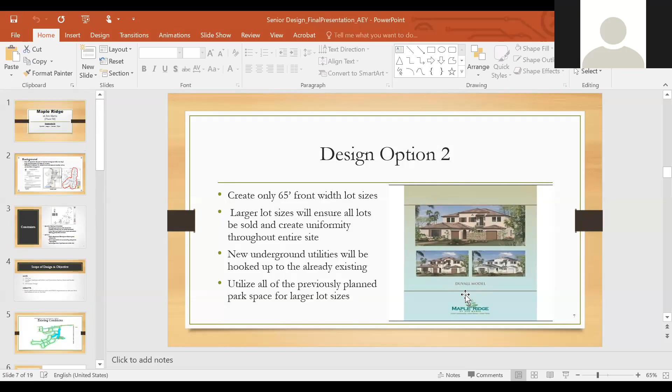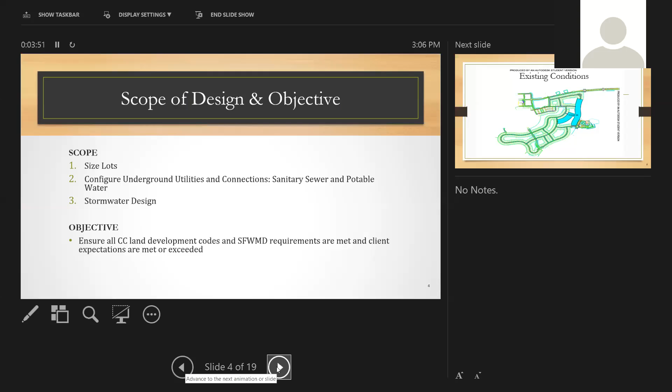Marcos, you still there? Oh, sorry, I forgot to unmute.

Apologies. Okay, so our first design option would be to use 55 and 65 foot front width lots only. In the bottom right in green, this is a green space we would be utilizing. It's previously planned as park space, but we would use it for these larger lot sizes. The red arrows show our previously constructed on-site lakes, which we would use for stormwater retention and treatment.

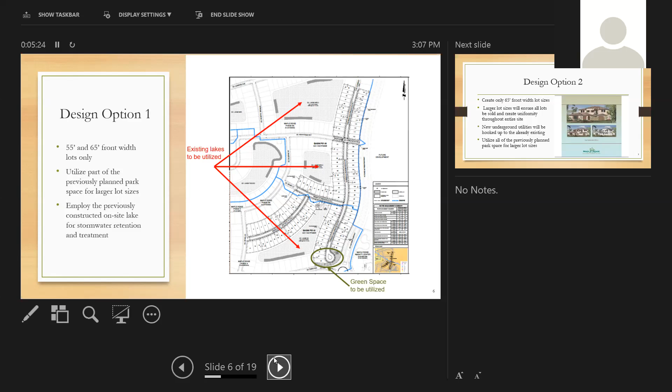Here's our second design option. This would be to create only 65 foot width lot sizes. This is considered an option because our client did state that the larger lot sizes were selling better, and it also creates uniformity. In this option, it's different from design option 1 because we would be using all the previously planned park space for the larger lot sizes. Again, underground utilities will hook up to the already existing underground utilities.

Here's our third design option, which would be to create only 55 foot front width lots. This would maximize the amount of lots in our development, which would exceed the 121 lots. We would still connect to the existing utilities, but we would also have to consider if having more than 121 lots would create any problems with existing infrastructure. Stormwater calculation would be done using the existing ponds again.

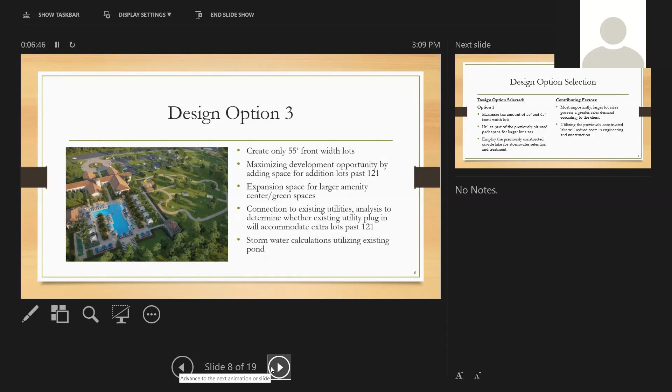So the option selection was, we ended up going with the one with multiple front widths, and we tried to maximize the amount of 55 and 65 foot front width lots. The contributing factor to that was, as we spoke about earlier, they were selling better, our client mentioned. So we figured that maximizing that would maximize sales, as well as utilizing the previously constructed lakes would obviously reduce cost in engineering and construction because they're already built and permitted.

Okay, so here we have some of the preliminary utility engineering assumptions. For this design, we focused on ensuring a water distribution network that would meet the requirements of the Land Development Code. To model the network, several design assumptions were necessary. WaterCAD was the program used to simulate the network. To model the existing connections, reservoirs were used at the connection points, provided with an existing water pressure of 89 psi. At the connections, the reservoirs were set at a foot of head of 205.59 to resemble a pressure of 89 psi at each connection point.

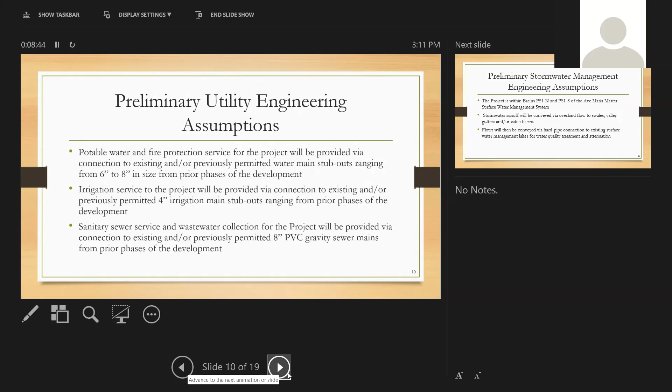Next, junctions were used to connect hydrants to the water main. The hydrants require 2,000 gallons per minute per the Land Development Code and need to be spaced at 400 feet, also per the Land Development Code. Junctions are also used to simulate demands of the 121 residential units. However, for this design, the focus is ensuring that 2,000 gallons per minute is available for each of the hydrants to meet the fire flow requirements.

All right, so some of the preliminary stormwater management engineering assumptions. As stated before, this is a master plan community, Ave Maria, a very large community. Phase 5B actually lies within the basins PS1-N and PS1-S, the north and south areas of that basin. The stormwater runoff is going to be managed by using overland flow off the lots to a series of swales, some valley gutters, and catch basins in order to discharge it into the 3 existing lakes for retention and treatment.

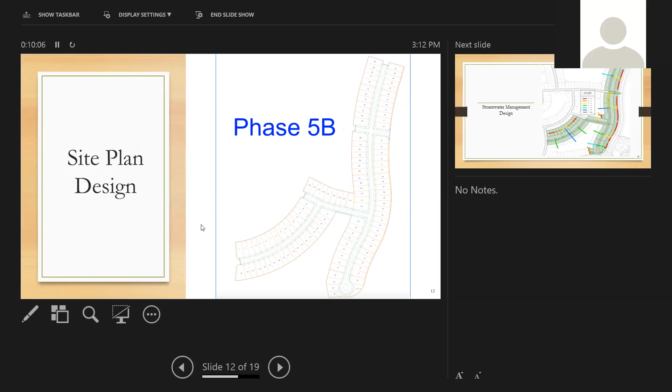So this is the site plan design. As you can see, the green space that once existed around the cul-de-sac was used to maximize the lot sizes. On the right side of the cul-de-sac, it says dog park, but it's just green space. We decided that area couldn't be used for a lot because of its awkward shape. But all of the existing lots on that road were either extended 10 or 5 feet to make them 55 or 65 feet wide in the front, to maximize the sales opportunity.

For the actual stormwater management design, we employed a Bentley program, StormCAD, which I'm sure many of you are familiar with. This was used to ensure that the existing lakes were ample to handle the discharge and treatment due to the new construction of phase 5B.

The model produced can be seen here on the right side of the screen, which is comprised of a series of catch basins and yard drains, various sizes and types of pipes including concrete and HDPE, and 9 outfalls to the existing retention lakes, 3 of those.

This model was created with some help from Nathan, as we had some licensing issues and other things. So we want to thank Nathan for helping us with this.

StormCAD utilizes the NRCS curve number method, which I'm sure many of you are familiar with, so I won't take too much time on that. I know we're running low on time here.

As you can see here, after creating the model, the program was run and the results can be seen here. This was just the outfall table. As you can see, the HGL does not exceed the tailwater elevation at any point, which shows that the existing lakes can be used to treat and store the maximum discharge.

After completing the initial model setup, for the utility design, the project required 15 hydrants per the spacing requirements. As shown in the table, the local fire flow required was set at 2,000 gallons per minute with an upper limit of 5,000 gallons per minute. By examining the existing conditions, the site contained 5 water main connections, each with a pressure of 89 psi.

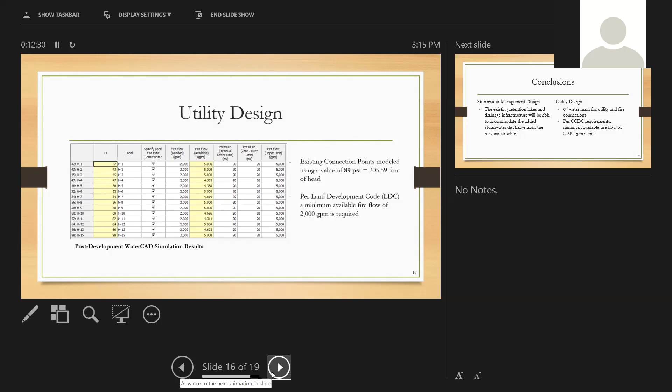Pipe sizing is also an important component of this design. For the initial simulation, a pipe size of 6-inch PVC was used over the entire network. After viewing the results, the available fire flow exceeds 4,000 gallons per minute at all 15 hydrants, so we did not increase the pipe size. Therefore, to conclude the utility design, a 6-inch PVC water main can be used over the entire network.

I already touched on this in slide 15, but in conclusion, we did conclude that the demand could be met by the 3 existing retention lakes on site for the new construction and runoff due to the new construction.

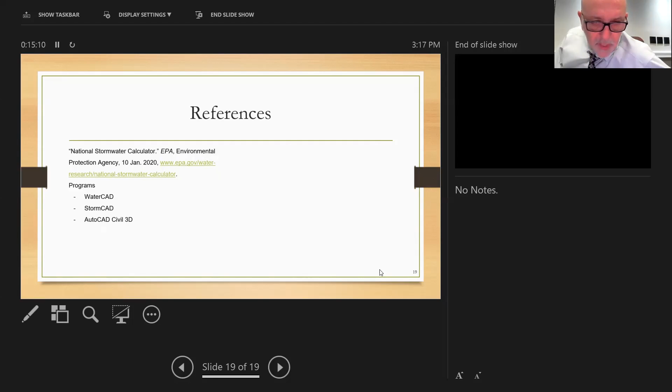They were not. They were previously constructed and in place, so we didn't specifically look at their weir elevations. We just wanted to ensure, for the scope of this project, that they would be ample to handle the flow from the new construction. We did not specifically check the outfall structures with the weirs because, A, they were already in place, and B, that would add a little bit of cost for our client. So for the scope of this project specifically, we did not check those weir elevations.

No, to answer your question. But obviously in the real world that would have been something that would have been addressed. For the scope of the project, we just neglected that. All right, thank you.

This is Julio. I got a question. In regards to existing traffic conditions, the original permit for Ave Maria had some traffic generation done by different sectors. So in determining the number of lots you can design in a specific area of Ave Maria, the limit on the amount of traffic you can generate from the new area might constrain your number of lots. Did you take a look at any of that?

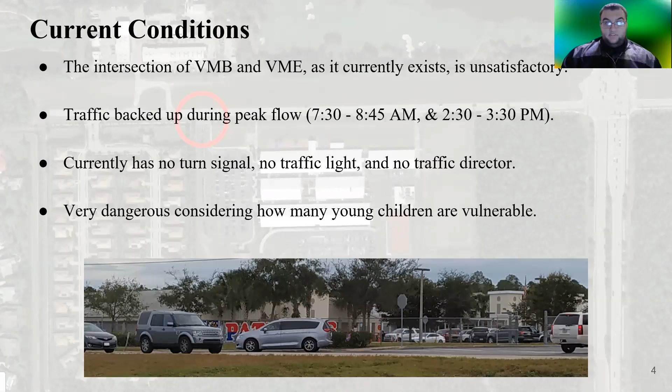To better understand what needs to be done for the roadway, we began by analyzing the present effectiveness of the intersection. To do this, we need to determine two separate things: our 15-minute traffic volume and our normal traffic volume. Afterwards, we could calculate our peak hour factor, or PHF, in the PowerPoint. Values between 0.25 and 1 are considered acceptable ranges, with 1 being the most optimal.

To find our traffic volume and 15-minute traffic volume, observation of the intersection had to be done. After meeting several minutes before a known instance of high traffic flow, we continuously noted the number of cars headed up and down the road.

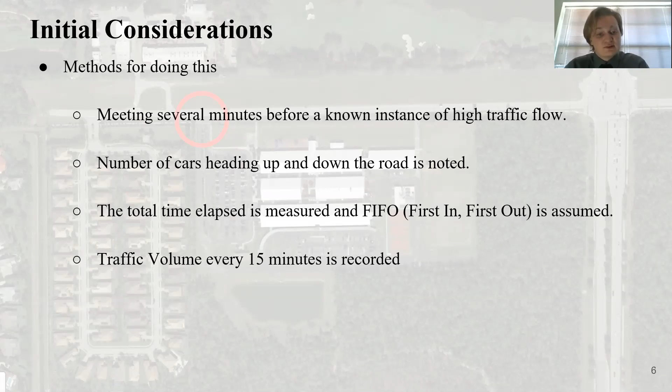During our analysis, we noted the total traffic volume at every 15-minute interval. At the end of our observations, we also recorded the total elapsed time and assumed that the intersection operated under first in, first out conditions.

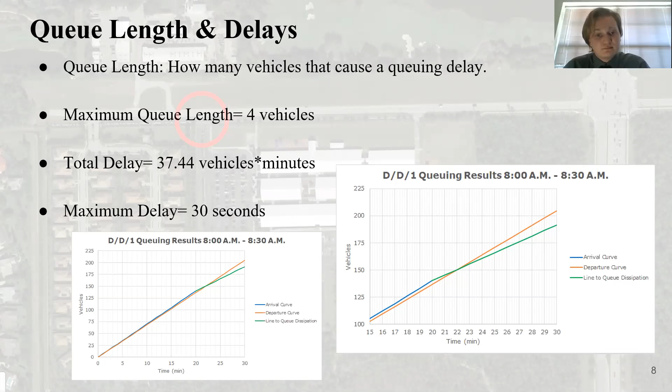We talked to our client, Christopher from Collier County, and we were informed about the new high school being built to the west of Veterans Memorial Elementary, and that Veterans Memorial Boulevard would be extended all the way to Old 41 Road. To account for the increase in traffic, we assumed a 4-lane, 2-way road for Veterans Memorial Boulevard.

So I'll briefly summarize the three alternatives we created, and I'll allow my partners to explain them in greater depth in the following slides. Our first alternative was to create one westbound turn lane where a left turn can only be made on green. Our second alternative was also a single westbound turn lane, but with a flashing yellow arrow. Lastly, our third alternative was two westbound turn lanes, with left turns only on green again.

Next, you'll see the AutoCAD drawings for these layouts. Options 1 and 2 are pretty similar in design, consisting of a singular left turn lane and a traffic stop. Both of these designs have only one difference: the left turn signal requires green to turn in option 1, while in option 2, the left turn signal is a flashing yellow for yield.

All right, here's our option 3 layout. This is the one we ended up choosing. This AutoCAD drawing shows the intersection having 2 left turn lanes going into the school instead of 1, and shows the 20-foot medians on both sides of the intersection. 4-foot wide bike lanes are included in the design, as well as a 10-foot wide pedestrian walkway that will allow plenty of students to cross at one time. All of the center, turn, and stop lines are drawn to DOT standards. Our team believes this is the most practical layout of the intersection to provide the best flow of traffic.

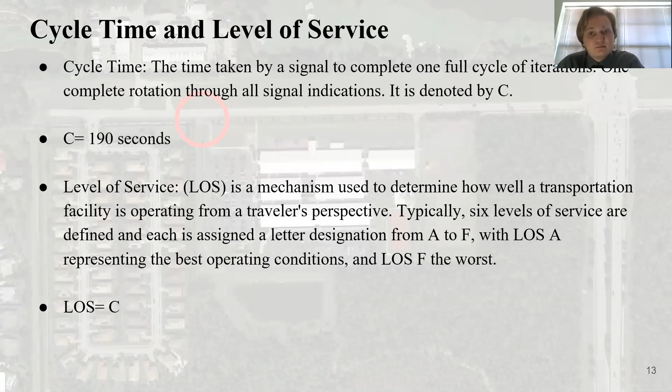This slide covers the cycle time and level of service. The cycle time is the time taken by a signal to complete 1 full cycle of iterations, or 1 complete rotation through all signal indications. Cycle time is denoted by C, and for this project we found the cycle time to be 190 seconds.

The level of service, or LOS, is a mechanism used to determine how well a transportation facility is operating from a traveler's perspective. Typically, 6 levels of service are defined, each assigned a letter from A to F, with LOS A representing the best operating conditions and F representing the worst. For this project and the design we came up with, we found the level of service to be C.

As mentioned in the client feedback, if the volume of vehicles is more than 300 vehicles per hour, there must be a second turn lane. The school morning traffic volume turning left from the westbound lane was calculated to be 354 vehicles per hour, which means the option chosen has to be option 3. This is also the option with 2 westbound lanes and a left turn on the green arrow only.

Further considerations were made regarding the radius of the connections between the streets. After researching the average turning radius of streets, we found information from the National Association of City Transportation Officials that gave us what we needed. Knowing the speed limit of the road, as well as the super elevation and side friction factors, we were able to calculate the radii used in our design.

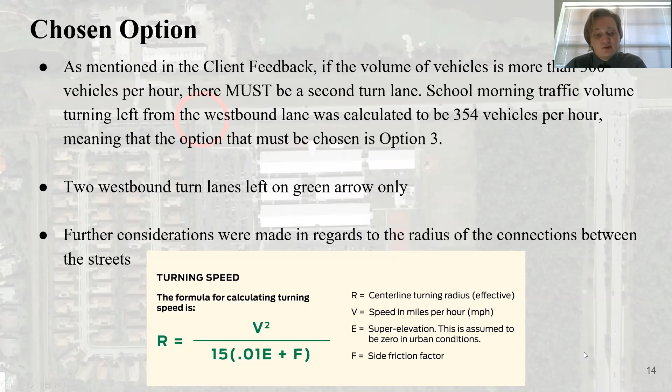We would have shown the flowing traffic via Synchro, but since this is now an online presentation, it can't be done anymore. So instead, we've decided to show screenshots of the delays per vehicle and the queues for all 3 options. Shown here is a Synchro layout of option 3, which is the chosen option as stated earlier.

This is the data of the morning traffic only, because as mentioned before, we couldn't go in the afternoon due to the outbreak. Due to the quantity of drivers turning left from the east, it is shown that drivers turning left coming out of Veterans Memorial Elementary, and the drivers who are either turning right or going straight from the west, have the biggest delay at 55 to 80 delays per vehicle. Having this means certain dimensions regarding timing might need to be changed once the new high school comes in.

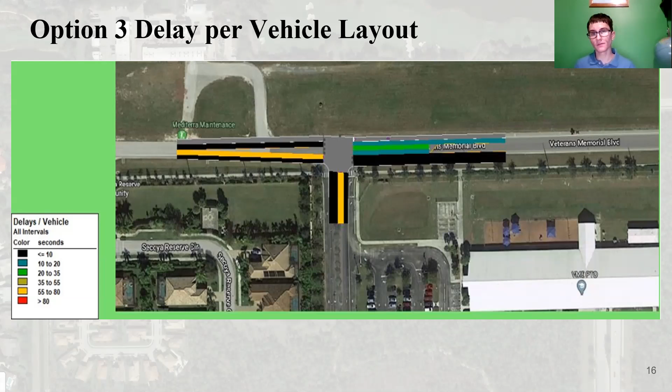So opposed to option 1, option 2 would have been a great option. However, it does not meet standards and it allows for a level of service B, which is better than C, but is not economically feasible. So having a level of service B there is a complete dream. It's never predicted to ever be reality. The reason it's a great option is because it has the least delays per vehicle.

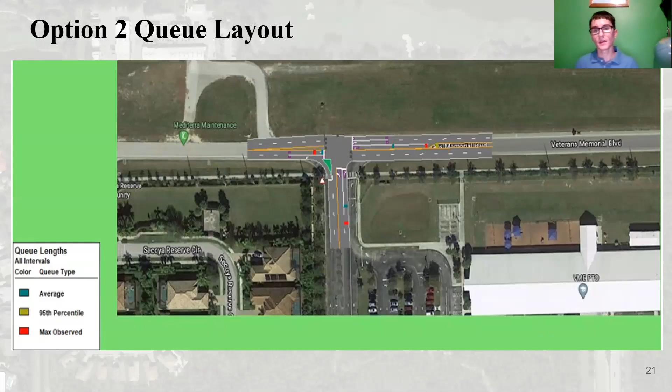Okay, thank you. Although option 2 creates the least delay, the 95th percentile queue length in the left turn lane is not an appropriate length. This option would cause more possible delay than option 3 in the westbound lanes of Veterans Memorial Boulevard.

So in conclusion, we would officially recommend our 3rd option because it meets all FDOT requirements and provides the most efficient alternative of the 3. It also would greatly increase safety and reduce the risk of accidents in comparison to the current layout.

Unfortunately, as Stephen mentioned, our layouts had to be mostly constructed from our morning traffic data because once the COVID crisis shut all the schools down, we were unable to go and observe the afternoon traffic to solidify our data, because no one was coming to school anymore. Our client from Collier County has approved of the designs, and his department will likely construct something similar once the country reopens and construction on the intersection begins.

That's pretty much it. Here's our references for the presentation and our formal reports. I'll just cycle through and give everyone a chance to see them. Thank you, team.

I just noticed that in your option that you're selected, you have the lane width as 10 feet. I don't know if it's the actual value or if it's a typo. I think it might be around like 10, 11, something like that. Was that also there in your analysis? That was the width of the lane, and why did you select 11 or 10 feet? Is it because of the right of way, or because 10 feet is a lot of stress in the system?

Well, currently the lane width is around, I measured it on Google Earth. The lane width is actually around 10 and 11 feet on Veterans Memorial already. So we just assumed that and went from there. Thank you. Yep, yeah, thank you, Dr. V. Yes, thank you, Dr. V. Can you stop sharing the team?

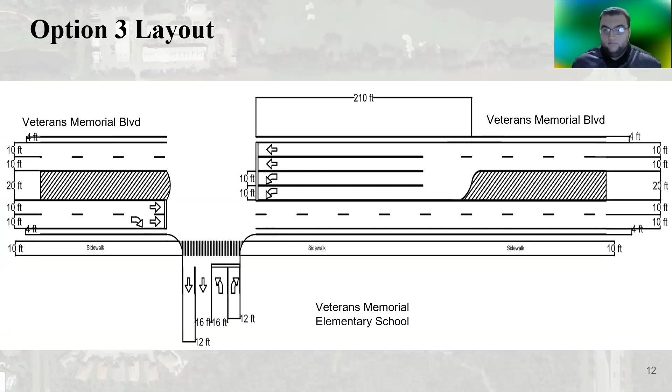Julio. Sorry, Javier. Perfect. Yep, go ahead.

Okay, so our project was on area GS10, and it's for land improvements, and we are JAM Engineering.

All right, so a little bit of background about the site. The site was previously used for mining, and it's abandoned, and it's under the Lee County 2020 conservation. Based on reports from 2019, there is no contamination.

All right, some of the problems. During Invest 92L and Irma, there was a lot of flooding in the area. So we're trying to mitigate the flooding in that area. There was significant flooding in canals, roads, and buildings.

So the design objectives for this project were, one, to control the flood mitigation. Javier said there was significant flooding that was causing issues with residential and commercial areas and the canals. The objective is to control water quality within the basins that we have designed.

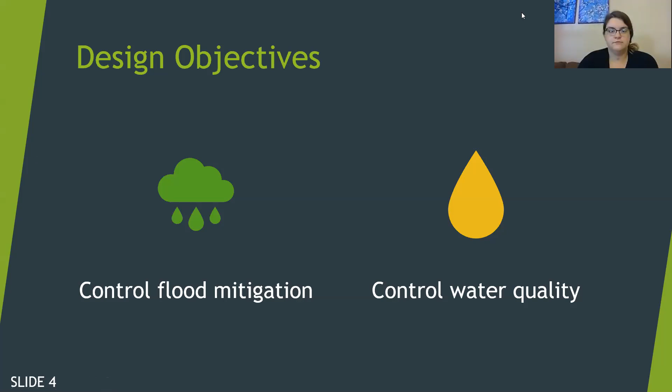I'm not hearing anything. She's muted, Ashley, I think you're muted. Can you guys not hear me? My thing is not cooperating.

The existing conditions and constraints for this project area are residential and commercial flooding, poor water quality with standing water existing on the mining site, wildlife habitat within the site, cypress trees, and wetland preservation. These constraints were taken into consideration when designing the 3 alternatives that Mitch is going to talk about later in this project.

My name is Mitchell Grant. This is a map of the various watersheds throughout East Lee County that serve the purpose of providing insight on the area in which our project would have a direct impact. It further aided in understanding where the flow of water leaving the system would have to travel before eventually making its way to the Caloosahatchee River, making us conscientious of the importance of water quality treatment. Ultimately, it helped in finding the approximate area of Section 10's basin to further aid in runoff calculations.

As part of the design criteria, we were tasked with coming up with 3 different design options. This allowed us to weigh out the pros and cons of each and then select the most beneficial and feasible option that is in line with our goals.

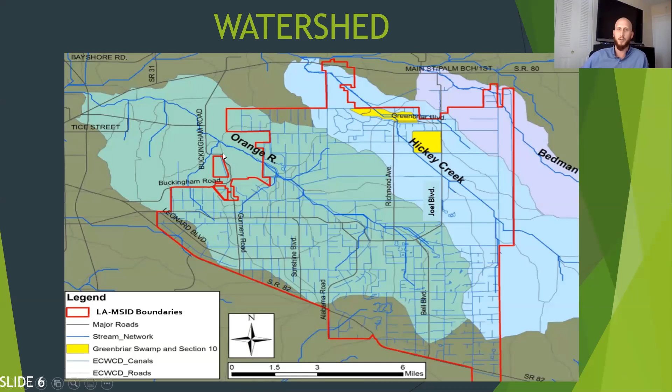Alternative 1: This design option includes the excavation of 2 large separate stormwater reservoirs. The system would collect stormwater runoff and rainfall naturally. There are no inlet or outlet structures.

Alternative 2: This design option includes the excavation of 1 large storage reservoir. The system collects stormwater runoff and rainfall naturally, and there are 2 outlet structures that control the flow of water out of the system. One sends water to Greenbriar Preserve to the north, and the other to Fox Canal to the west.

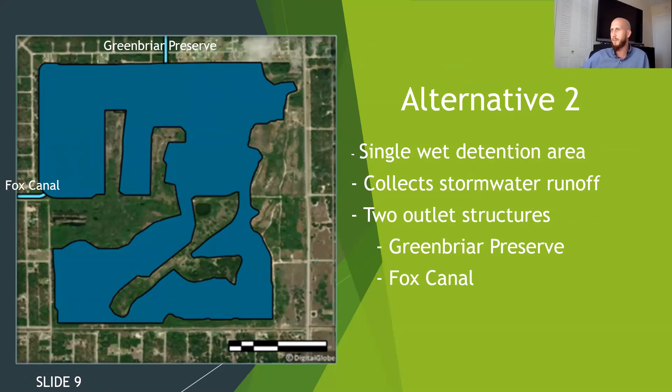Alternative 3: This design option includes the excavation of 2 separate large wet detention ponds. The system collects stormwater runoff and rainfall naturally and through canal inlets. The inflow of water from Easy and Kings Canal is regulated through inlet structures. Flow from Basin 1 is transferred through the filter marsh and into Basin 2 using gravity flow. 2 outlet structures control the flow of water out of the system into Greenbriar Preserve and Fox Canal.

We wanted a system that could accommodate both water quality and water storage, so we decided to choose option 3.

This is option 3, the one we went with, and we made the calculations. You can observe the filter marsh, and it was designed based on the gravity flow. The total length of the filter marsh is about 2 miles. For each section, there is about a 1 foot drop in elevation, which will give a smooth gravity flow.

The water gets into Basin 1 through the Easy Canal and moves into the second basin through the filter marsh or through the outlet control structure situated here, and goes out into the Fox Canal through the existing canal, or it's directed to the Greenbriar Preserve via a culvert pipe that will need to be calculated. We didn't do that yet because there are a few roads there that cannot be disturbed.

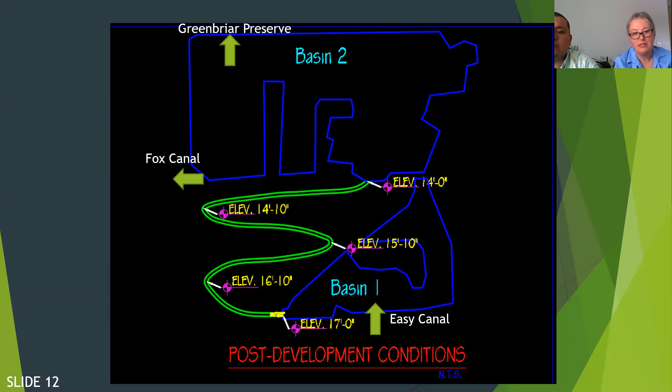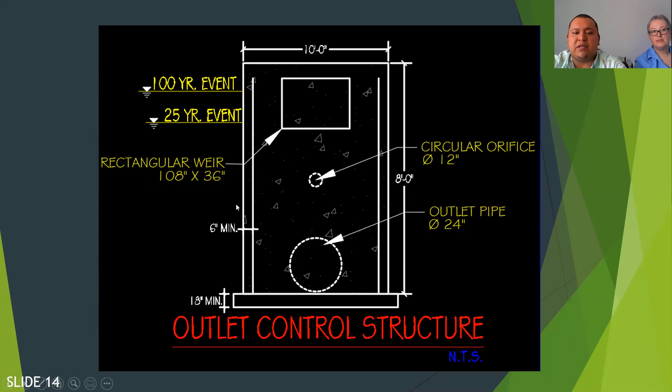To calculate the permanent pool volume, I used the modified rational method and not the rational method, because the modified rational method uses the storm duration, which is different than the time of concentration. This gives a lower peak flow and a larger volume, which we need to make sure will accommodate the Hurricane Irma runoff. So we came up with a permanent pool volume of 2,073.5 acre feet.

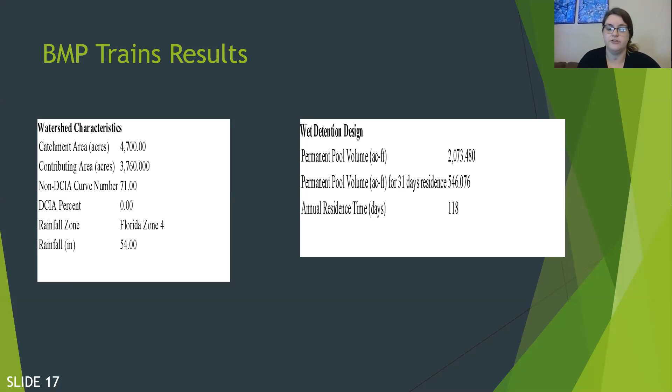We kind of lost her.

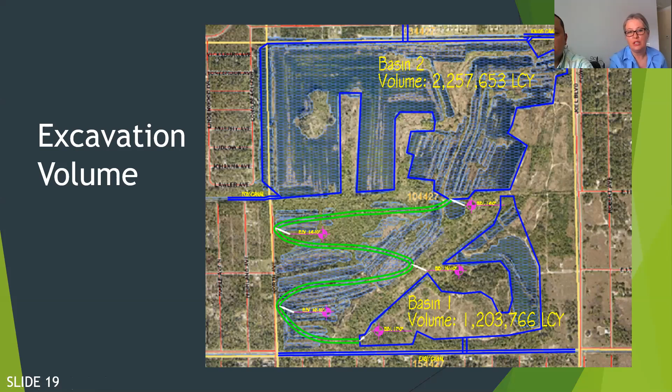For the cost of the project, since it's such an elaborate project, we didn't have the means to calculate the total cost, but we know the excavation cost is the biggest one. We calculated that and came up with a total of 2.25 million loose cubic yards for Basin 2 and 1.2 million loose cubic yards for Basin 1. The total cost of excavation will be around $20 million, a little bit over.

So to conclude our presentation, with this project there's little to no impact on the environment. We are keeping wetlands intact, incorporating more vegetation through the filter marsh, and the flooding was controlled and water quality was improved. So all in all, the project was a success, and this concludes our presentation.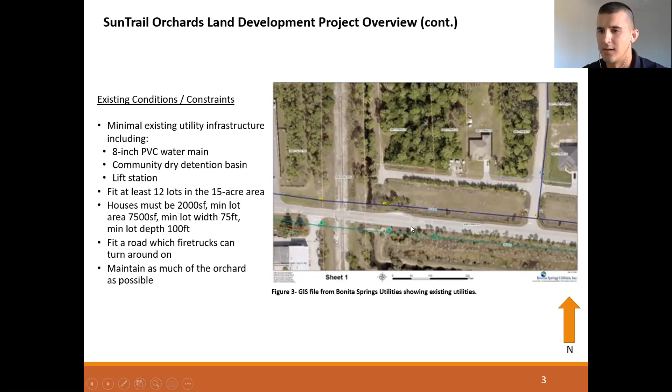This image shows the existing infrastructure that we would tie into. Our site is located here. In blue is the 8-inch PVC water main, and in green is our existing wastewater piping. We had an existing lift station that we would tie into, and at the bottom center here is our community dry basin that we would tie our stormwater runoff into.

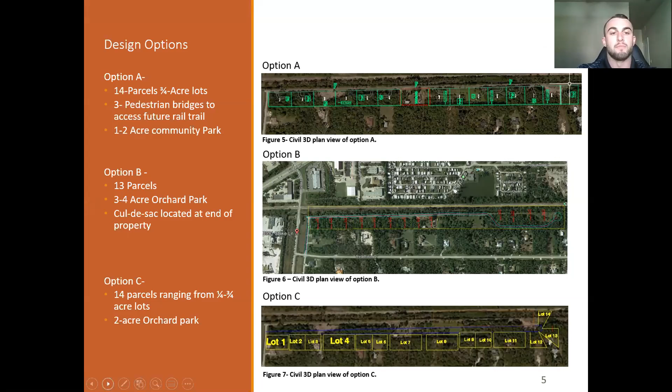On the next slide are all of our designs, options A, B, and C. They all featured 13 or 14 parcels, ranging from a quarter acre to three-quarter acre lots. All 3 design options had an orchard park to maintain as much of the orchard as possible. Option A had 3 pedestrian bridges to access the future rail trail on the other side of the canal, and option B had a cul-de-sac at the end of the property.

For our final analysis, we took each of those designs and thought about the benefits and disadvantages, composing this table you can see in figure 8. Looking at the advantages and disadvantages of the design, we thought about what would maximize our profits at the end of turning our plan set over. We took 5 things into account: technical, financial, time to complete, environmental, and societal aspects of the design.

For our final thing, we came up with an official construction plan set. Figure 9 is the cover page of our plan set. We came up with 20 sheets, which you can see in the sheet index. The aerial location map is basically the southern part of the property, and that shows the entrance to the property.

The vicinity map shows where the property is located in the state of Florida, prepared for, as well as zoning. Those boxes indicate further details for the project, as well as specifications of the parcel itself, and then a legend. As we go through the plans, this legend indicates what we called out in the plan set.

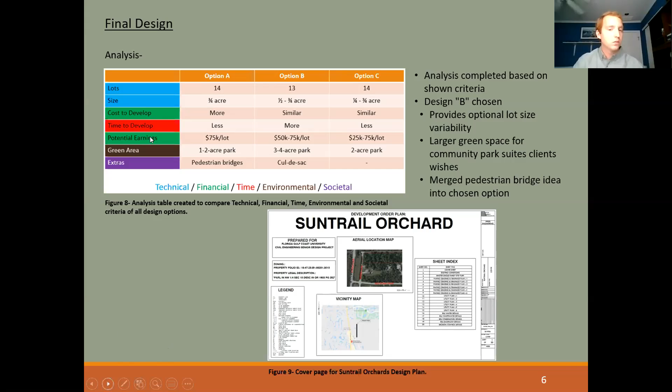This image shows the paving, grading, and drainage site that we developed. There are 7-foot wide swales on either side of a 20-foot road. On the east side of the road, we have a 6-foot wide sidewalk.

The lots are designed as split drainage at the very south of the property, right here. For the swales, we designed 2 drainage structures to direct stormwater runoff off of the property. Here are the drainage structures at the south side of the swales, and those would tie into the dry detention storage area we saw at the south of the property, using a control structure to regulate the proper drainage from the site.

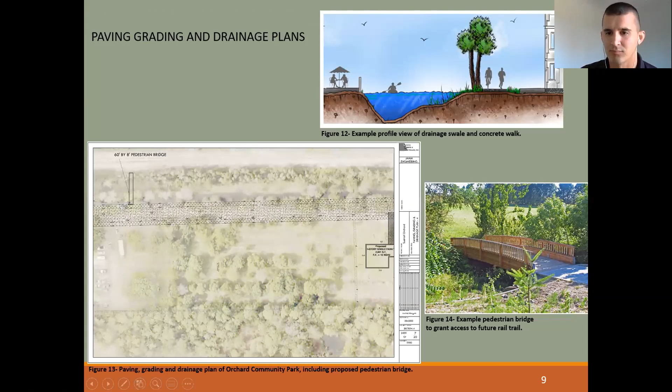This is the north of our facility, and this is where we designed a hammerhead to comply with the fire safety code, allowing a turnaround for fire trucks and first responders.

For the water main design, we decided to go with an 8-inch water main, which, in accordance with the Bonita Springs Muni Code, fit the required flow we figured we'd need for the residential properties, along with a 2-inch service connection from the water main to each home.

Also on this plan is the utility plan. We're calling out the gravity-fed sanitary sewer main, which was proposed to be designed and installed. The sanitary sewer main runs down the middle of the road that will be installed.

Like we talked about earlier, there was existing sewer and water mains already established. To the left of the plan, or far south of our property, there's an existing lift station, and that's what our gravity-fed sewer main would tie into.

Each property, or 14 of the lots, would have a utility sanitary sewer line fed to them, which would be 6 inches, and the main itself, the sanitary sewer main, would be 8 inches. All of this is called out.

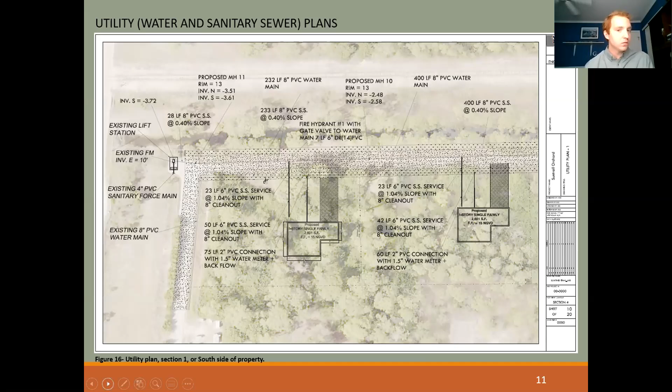So like I said, it was all called out, and this is now looking at the far north end of our property, and how we came up with the slopes of the sanitary sewer main.

The main would have manholes approximately 400 feet apart, and the diameter of the lines, all of those were found in the Bonita Springs Utilities Standard Specification Handbook, found on the Bonita Springs website. It was important to follow these guidelines.

So like I said, the slope, there was a 1.04% slope of the sanitary sewer line for each service.

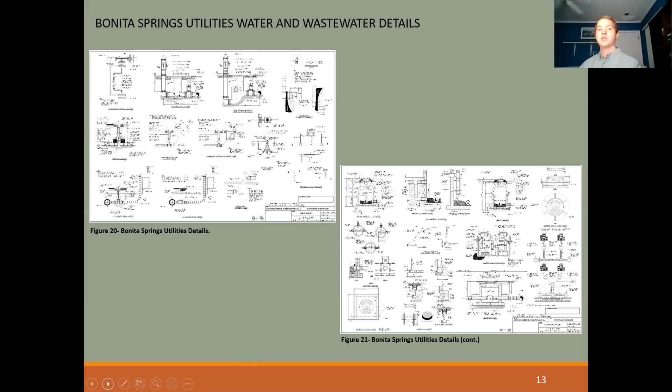And then our final plan set was the erosion control detail. Basically, before any ground would be constructed on the property, these erosion control measures need to be established.

So your construction entrance, your silt fence, which, whenever dirt is moved around on the site, prevents it from going into neighboring properties or lands, silt fence needs to be established.

And if there are any existing storm grates, putting sod around the storm grates prevents soil from getting into the storm system and clogging those pipes, which could be, once again, a hassle.

Moving to the cost of the design, this is an opinion of probable cost sheet. It gives us an idea of how much this design is going to cost, and also shows us how much of each material we need.

It's split into 7 main categories: water system, sanitary sewer system, paving, grading, drainage, landscaping and irrigation, and a miscellaneous section. All these categories totaled to about...

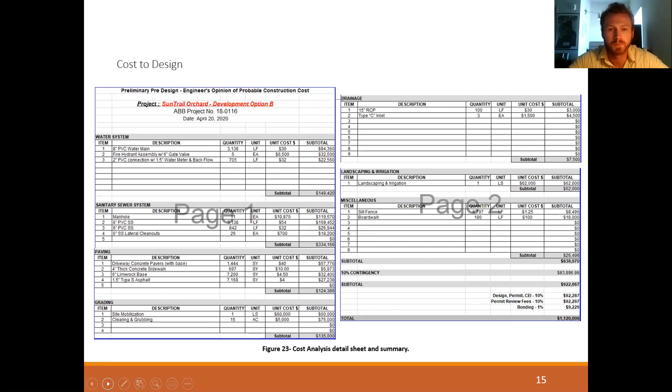Our grand total came out to roughly $1.12 million. This is a cost summary of our design, looking at the 7 main categories we had and how much each of them cost.

The sheet also shows us the extra costs, like the contingency and the design permit fees. Once again, the total cost was $1.12 million.

So in conclusion, we came up with that if we sold each home for $350,000, we would net a profit of about 3.4 million, which we determined that this development was a viable project that could actually be constructed.

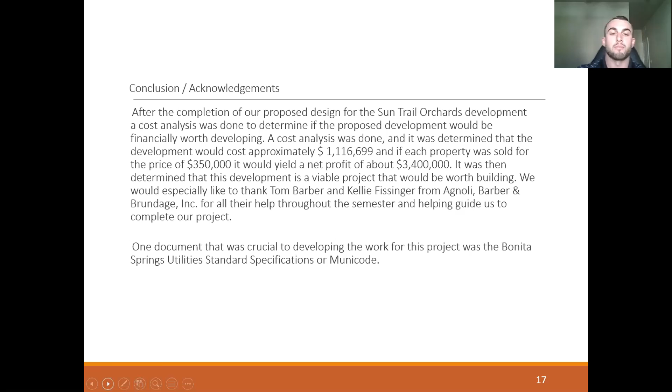So back to the judges, if you have any questions for JAMM Engineering. Okay, one good presentation, thank you.

One quick question: it looks like you run about 3,000 feet of water main all the way down to the cul-de-sac, and I'm assuming that would be your last fire hydrant. Did you do any hydraulic calculation to make sure there is water coming out of that fire hydrant? No, we didn't do any hydraulic calculations like that. We did do calculations for each fire hydrant, but none like that, no. Okay, thank you.

We have time for one more question. I saw finished floor elevations on the house sites. How did you determine the finished floor elevations? So I'll take that one. We found the existing site elevation was around 12 to 13 feet, and then based on that, the Bonita Springs municipal code is where we determined the finished floor had to be a certain distance above that site elevation. Thank you.

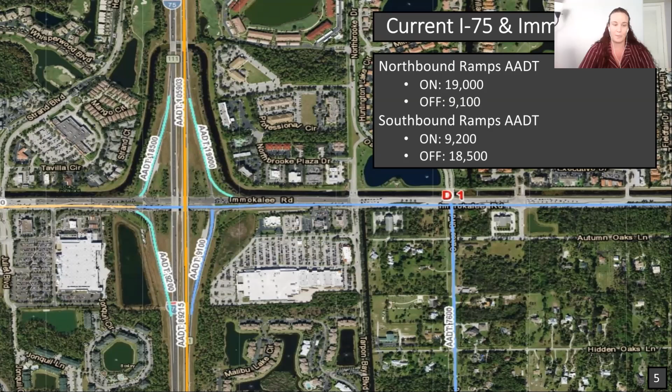This is I-75 and Immokalee, the intersection just north of Vanderbilt Beach Road. It's similar in makeup but obviously a little less. The northern entrance, the northbound on-ramp and the southbound off-ramp for both of these intersections, controls about 67% of the traffic in that area. Vanderbilt Beach Road is not connected at this time. We calculated peak hour rates of about 2,400, and our physical counts from January averaged out to 2,608.

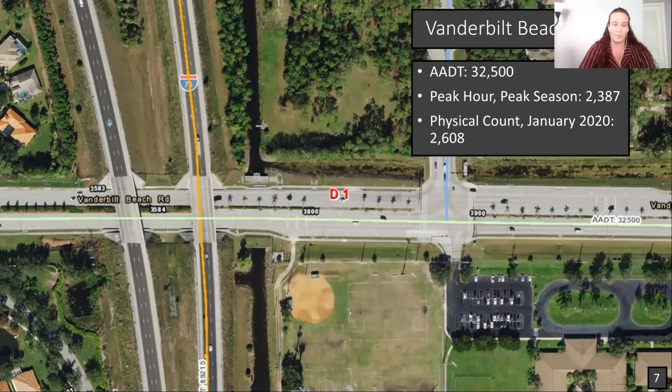Of special note, we looked at Oaks Boulevard, which connects Vanderbilt and Immokalee Road. There is no light at Immokalee Road on Oaks, but there is on Tarpon Bay just to the west. Particularly notable, the counts for Oaks Boulevard's southern area show 7,000 more cars per day than the northern part of this road. This indicates a lot of people moving from Vanderbilt taking that left turn at the light to get onto the interstate.

Hi, my name is Christian, and I will talk about the constraints that need to be considered for the design and the final selection of the interchange.

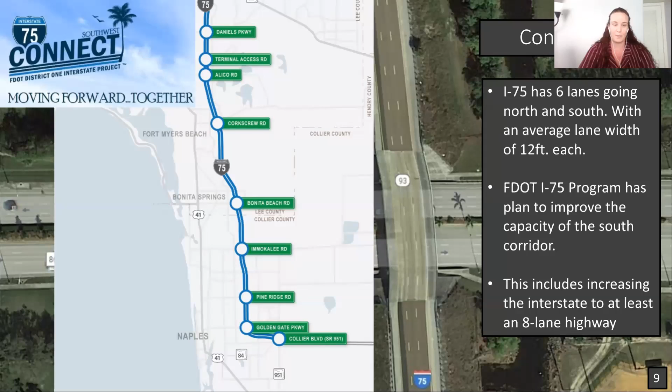First, I-75 has 6 lanes going south and north with an average width of 12 feet per lane, but it will expand to 8 lanes as it already has in some areas, according to plans of the I-75 Southwest Connect project.

Now for Vanderbilt Beach Road, the average lane is about 11.3 feet. It has 6 lanes going west and east. There is a median of about 8 feet and an overpass with a clearance of 16.3 feet. Sidewalks are present in both directions. With these dimensions, we have concluded that it's possible to have 2 turning lanes coming from the northwest ramp of I-75.

In order to design which type of interchange will work better, we took into consideration the proximity of the highway to populated areas. In the northwest, the Wilshire Lakes community extends along I-75 with an average separation of 120 feet. Considering the embankment slope, this leaves us with only 75 feet to place the ramp.

In the southeast area, the Village Walk of Naples is close to I-75, but there is enough space to work, plus there is already a noise wall in place. The canal on the east side needs to be covered in order to complete the ramp. The biggest concern is how this will affect the hydrology of the area and whether or not it can be mitigated.

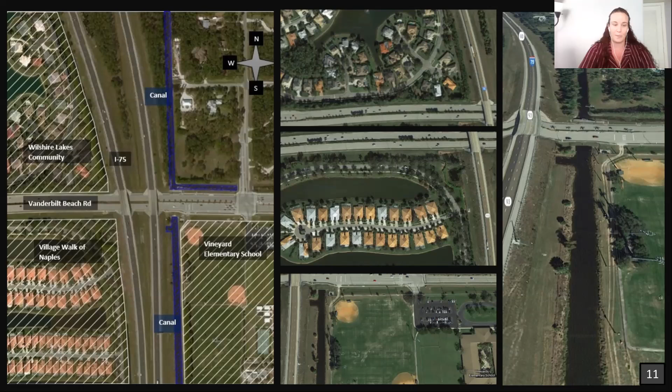In the southeast, there is the Vineyards Elementary School. This represents a safety concern as there will be vehicles moving at considerable high speed close to the baseball and soccer fields.

So our team initially brainstormed 3 different solutions to determine which would be the best fit for our interchange. The first proposed solution is having a middle off ramp for the southbound lanes. This ramp would be a left exit off of the southbound lanes and enter Vanderbilt Beach Road between the 2 overpasses. The other ramps would follow the standard diamond interchange. This design would really require retaining walls on the insides of the overpasses, and it would allow for less private property to be acquired, especially on the west-hand side. Unfortunately, the future proposed expansion of I-75 may prohibit this design, and overall, the estimated cost of this design would have been about $56.81 million.

Hey everyone, I'm Jacob, and I'm going to talk about our next solution, which is the tight diamond. It's an approach that's common to densely populated areas because it requires minimal land use. We estimated about $46.5 million in construction costs, making it considerably cheaper than our alternatives.

The limited area on the west end of I-75 would require retaining walls necessary for the embankments at the exits located here. We would also need to implement signalized intersections, which would be placed on either side of I-75. However, with only 200 feet for the southbound turn lane and 400 feet for the northbound turn lane, we may see traffic that overflows into the through lanes.

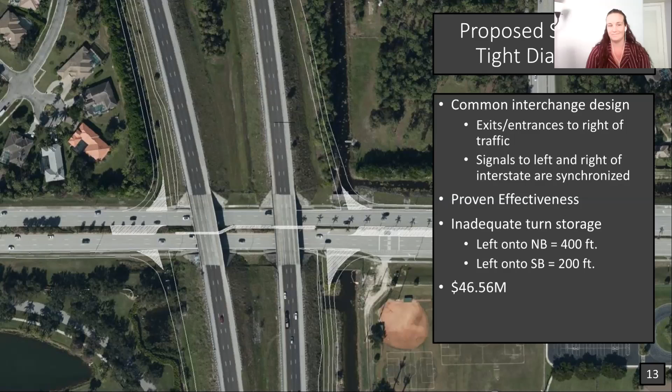Our third design was a southbound flyover. The exit and entrance ramp to the southbound lanes exit to the left of the flow of traffic. They overpass the northbound through traffic and come together at a single point urban interchange at the east side of the interstate.

So this is our only design that actually allows adequate distance for our storage lanes for our left turn lanes onto I-75. The total cost, however, on this one is about $152 million, so it's roughly 3 times more than all the other designs here.

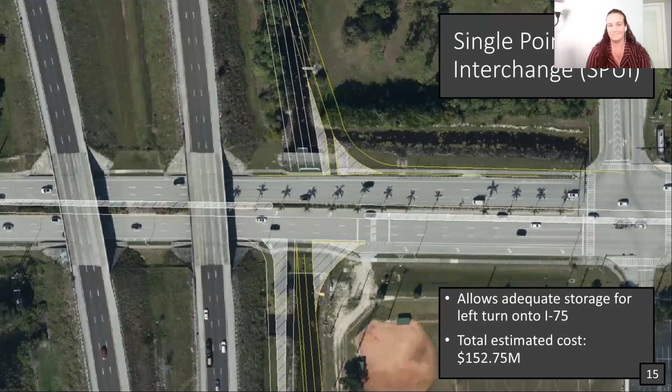There are a couple of common requirements for each of these designs. The first thing we're going to look at is the movement of our intersection at Oaks Boulevard. Currently, there's a light there, like I mentioned before. For adequate flow through all of the traffic lights, we would recommend closing this off and creating a new road here at Vineyards Boulevard into English Oaks Lane.

Now, this would close off or at least remove the lighted intersection that allows access to the Vineyards Elementary School and the connected fields there, but they do have access already through Vineyards Boulevard.

By replacing the existing embankment slope with a retention wall, it will allow us to move further away from the communities, so it will not be necessary to build a noise wall or to acquire land. The ramp can be as close to I-75 as needed. The retention wall can cost up to $3 million on top of the construction of the interchange.

The gravity wall is the best approach for the retaining wall, as the height needed goes over 16 feet. As shown in the first drawing, the distance of the slope is 42 feet, close to the community. But if we include the gravity wall, we can move as far as possible away, closer to I-75, as shown in the drawing. It will allow us to keep the same number and width of the lanes, but with the advantage of a bigger radius of curvature.

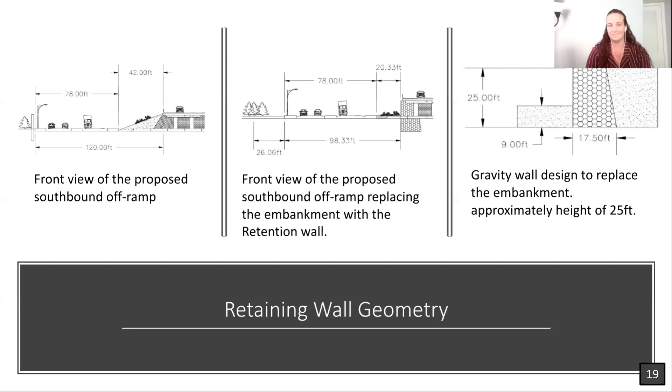Moving on from the canal, we're going to discuss the retention area located in the southwest corner of the intersection as shown. The entrance ramp at this location would directly interfere, similar to the canal, also requiring us to cover it. It's about 10,000 square feet in area.

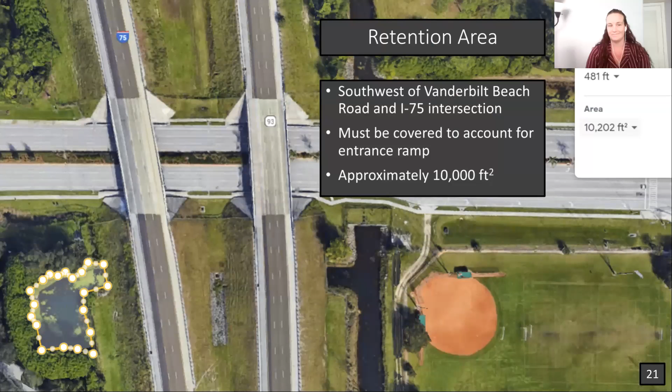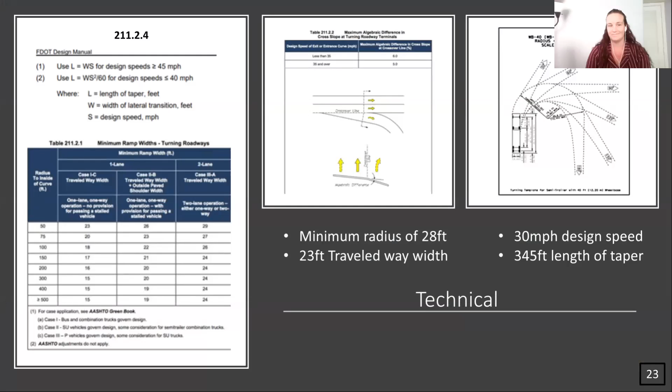So this is just the technical considerations that we used for our design. These are all from the Florida Department of Transportation Design Manual, and they were the considerations we used to generate some of the final data that we got.

This is just a brief overview of what we've already discussed. For our final design, we decided to go with the tight diamond. It will feature 4-lane off-ramps with directional islands and retaining walls as mentioned, due to the limited area. The canal east of I-75 will also be covered with the box culvert, half a mile north and south. We will also remove the intersection at Oaks Boulevard, where traffic will be rerouted so it can keep the connection with Vanderbilt Beach Road.

Considering the cost and scheduling of this project, we looked at the research and development, designing, planning, permitting, and construction aspects. We determined that it would cost approximately $66 million, and we estimated about 102 months, or about 8.5 years, from start to finish for this project.

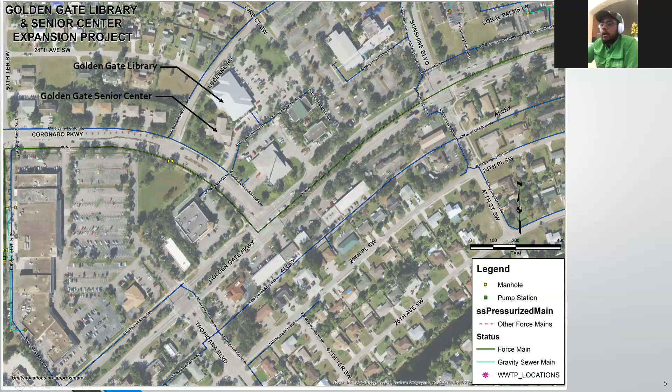Can you guys hear me? Yes, sir. Okay. What you see on your screen now is an aerial image generated by GIS. It points out the Golden Gate Library as well as the Golden Gate Senior Center that are currently on site. This is an accurate aerial image as there's only landscaping behind the current existing buildings. I'll go to the next slide.

We'll go to the next slide. The challenges we came across through the design process, specifically with drainage, were where to tie the inlets in. When water falls on the site, it currently just sits on the grass with nowhere to drain, but now that we add this impervious area behind the existing buildings, we had to figure out where the water was going to go.

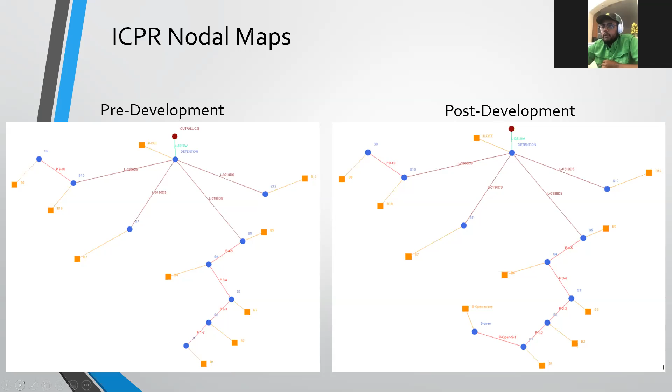These are the ICPR results. The two important elevations to look at are the detention areas in all four different storms. On the left, we have our pre-development storm for the 25-year 24-hour storm and the 100-year 72-hour storm.

The first important storm we look at is the detention area for the 25-year 24-hour storm. As you can see, it stages to an elevation of 11.55 feet. This was originally thought to be wrong when running the pre-development ICPR model, because generally the 25-year 24-hour model is supposed to stage to the berm elevation, and the existing berm elevation is at 12. When looking at the record drawings, we noticed whoever designed the plan originally decided to account for a new proposed building, also 6,000 square feet. So that shows our group they were already accounting for this additional impervious area. We went with the 11.55, knowing it would stage higher.

Looking at our post-development ICPR detention area for the 25-year 24-hour storm, the maximum stage is 11.96, approximately 12 feet, so we assume this to be right, and that's how we know our site is draining properly. Another indication is looking at the other nodes, S1, S2, S4 — those are all existing inlets on site, and they already have elevations of about 11.34, 11.4, all the way up to 11.75. So it's only staging to 11.96, 11.97 — you can see there's only a little bit of water on top of the existing inlets, showing that it does drain properly.

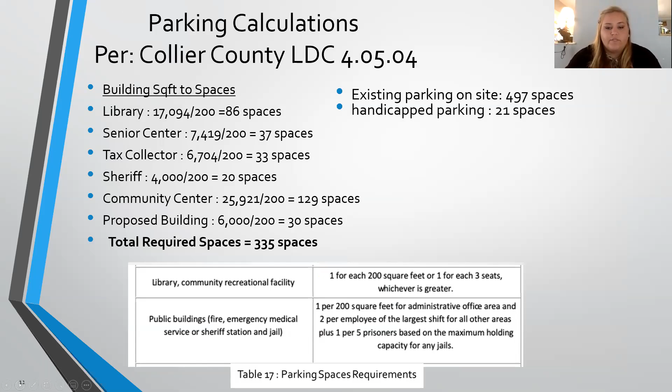With grading the site, like Max had mentioned, we really had to be careful with getting the water away from what was already there. We had to propose a swale between both the library expansion and the existing senior center because the finished floor elevations were at different elevations. We also proposed a swale along the back of the library. We used 11 yard drains with 12-inch PVC pipes to collect the extra water and route it to the existing stormwater inlet that Max had mentioned.

In order for us to connect to that stormwater inlet, we do have to demo part of the existing driveway into the property, requiring about 750 square feet. We calculated this using 15 feet on center for dewatering and for allowing extra room to place the proposed pipe. We found this to be a better solution than going to a different inlet.

On the screen, you can see our proposed layout of the piping. Our proposed swale elevation stayed current between the buildings because they're set at equal elevations, so that proposed swale stays at 12.8 to help collect the water. There is an existing swale along the back that we were able to tie into and set our yard drains.

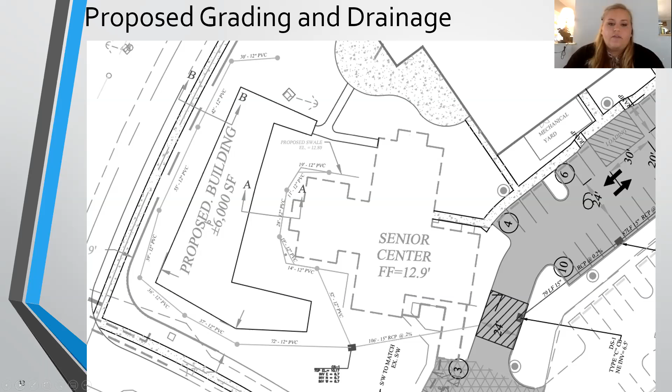And if we go to the cross sections. Cross section A is between the two buildings, and this is standard throughout. So I was able to show that it's a 10% grade from the proposed expansion to the swale, and then it's 8% from the existing senior center. For the expansion out to the existing sidewalk and the roadway, it is a steeper slope, but it varies throughout. The steepest slope that I had was about 20%, and other places it was closer to 8, just because we were going from elevations of 14 down to some that were like 11.

But I felt that that was acceptable. And there's existing landscape in that area.

Hi everyone, Dylan here. So another task we had was ADA compliancy, because it is a senior center with handicap needs and whatnot. Our task was to design by standards the connection between the two buildings, because one was at 12.9 or whatever, and the other one was 14. So we needed to make sure it was a 12-to-1 slope between the two, and we needed to find a place that we could fit it between the buildings that would look good and work well.

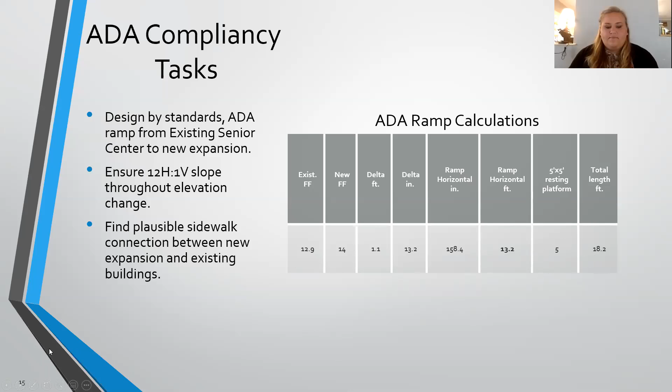Here's just the simple ramp calculations to get the slopes and the total length that we needed. ADA compliancy does require a 5x5 resting platform between the two if it goes over a certain length or distance of a slope. So we had two options here. We didn't really need the 5x5, but it would assist since this will be traveled a lot by seniors and people that might have disabilities.

The best option probably would be option 2. We see that the 6.6 and 6.6 will be at 12% combined, and this here would be at 12% as well. And right here is the proposed connection. Here is the senior center now, the expansion, and the library. So here you see, this is just depicting option 2.

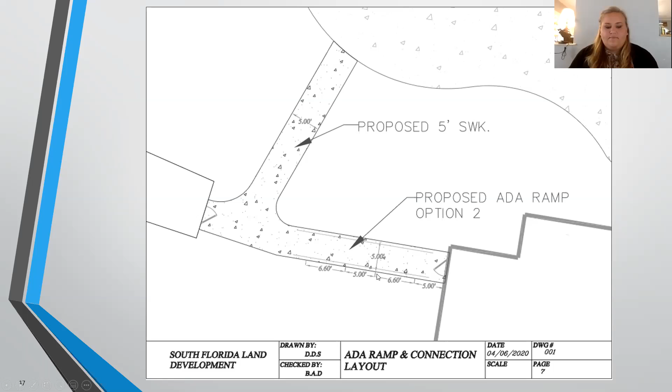All right guys, so this is- what's that? Okay, you have 1 or 2 minutes. Yeah okay, I'll wrap it up. So there is an on-site- you're welcome.

There's an on-site pump station, and it is privately owned and not maintained by Collier County, which made it a little bit tougher to get a hold of the owners and whoever maintains it. When we went to do an analysis and measure the pumping rate, what I would have personally rather done was a pump down test at the site. However, we weren't allowed to access the site or the lift station, but they did eventually get back to us and send us a detail sheet. The detail sheet gives us a system curve, and it shows us that the pumping rate from the manufacturer, given the head elevation and everything, at the best possible outcome was 44 gallons per minute.

It is typically higher for a 2 horsepower pump. However, this pump is a grinder pump, so it's designed to grind up solids coming in, usually placed outside correctional facilities or rec centers and stuff like that. So it's not usually to displace more flow, but to pass the solids. Since we weren't allowed to conduct a pump down test, we just had to use the best possible pumping rate.

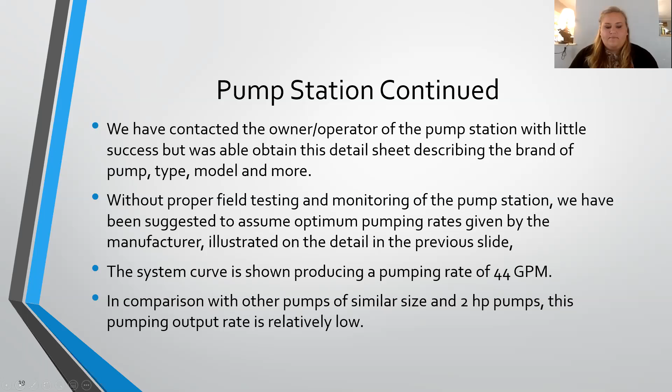So to do this, we usually just start very simply. We find the pumping rate of the on-site pump station, which we decided was 44 gallons per minute. We analyze the inflow of the senior center and the library, and then we also calculate the additional flow provided by the proposed building with the 2 bathrooms. At the end, we compare the inflows after the proposed building with the existing and a new pumping rate, and we can find which one either can handle it or can't, or which one proves better.

So go to the next slide. Next one after that, please.

I actually have access to software with ABS Sulzer, and I was able to choose a pump. This pump is also a grinder pump, so it matches the same function. It's relatively the same horsepower, but it does, however, produce almost twice the amount of flow with the given head. Next slide.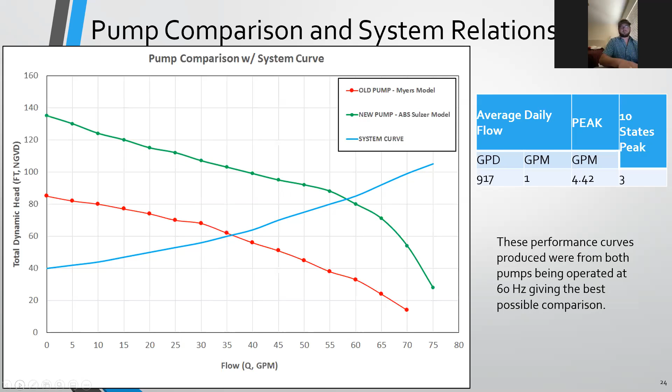I used the 10 States Standard, per Collier County design criteria, to find a peak hour inflow of 4.42. Comparing that with the average gallons per day gave me about 3 gallons per minute. Next slide.

There are a lot of things we can analyze to determine whether one pump was better than the other. I decided to find the total amount of pump time it would take to pump down the total volume in the pump station. With the old pump, it would take around almost 6 minutes, which is a long time for a little pump to be running. With the new pump, it was around 3 minutes, which isn't great, but it's a lot better than the old pump.

In conclusion, I think the old pump really needs to be upgraded, especially if they plan to expand more in the future. Even at best conditions, it can't keep up and is only halfway up to par with the new pump. I also recommend selling the station to Collier County and having them maintain it, because they can take better care of it and it's a lot better on a monthly rate. We don't have to worry about the red light coming on all the time. So that pretty much sums it up.

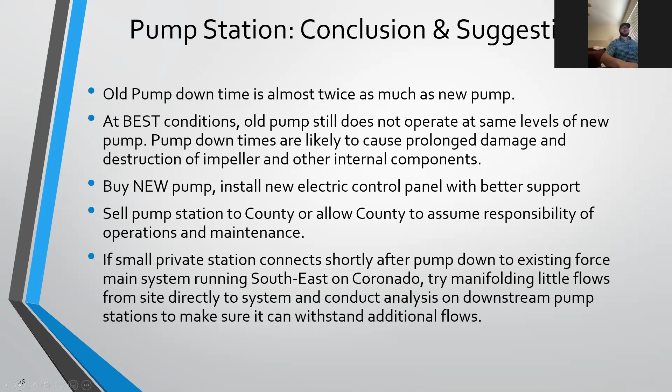We would like to thank Ayub and Claudia for helping us every step of the way. They have been extremely helpful, and of course Dr. Wynn for everything he's done. So we're open to questions.

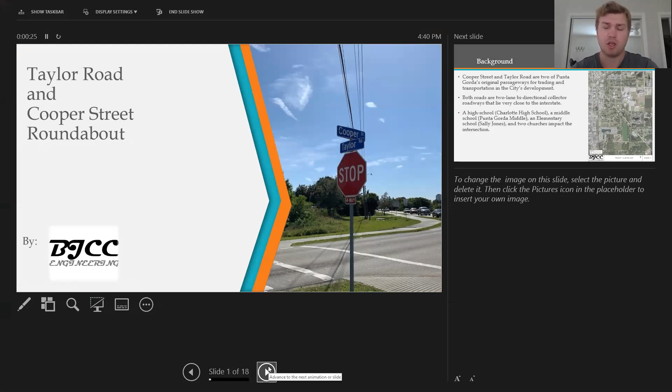All right, can you hear me? Yep. All right, so we are BJCC Engineering, and we designed the roundabout at Taylor Road and Cooper Street in Punta Gorda. Our mentors were Mitchell and Michael.

A little bit of background on the intersection. Cooper Street and Taylor Road are 2 of Punta Gorda's oldest roads, and they were good passageways for trading and transportation back in the day during the city's development. Both roads are 2-lane bidirectional collector roadways that lie very close to the interstate. We have I-75 to the east and US 41 to the west.

We have a high school to the north of the intersection, a middle school next to the high school, a church to the west, and an elementary school to the north. So there's a lot of inflow and outflow traffic going through that intersection. Next.

A little bit of the scope of work that we were required to do for the project. We were to design a roundabout at the intersection, or find alternatives to the roundabout. We are to acquire necessary right-of-way that is in the limits of the roundabout or our alternatives, adjust utilities as necessary, and design new drainage around the roundabout or our alternatives. We are also required to make cost estimates for our roundabout and alternatives.

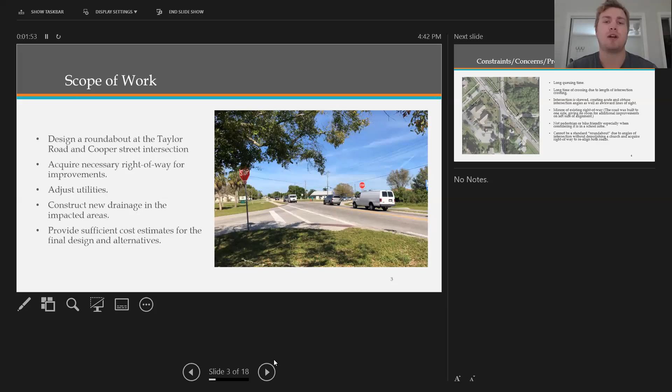Some constraints, concerns, and problems. At the intersection, there is a long queuing time at peak hours, probably when there's church on Sundays or during the week, and when there's schools in the morning. There's a long time of crossing due to the length of the intersection crossing. It is at a weird angle, creating obtuse and acute angles, so the time of crossing is a little bit longer than usual and causes distractions and accidents because of the length.

There is a misuse of right-of-way along Cooper Street. You can't see it in this picture, but down a little ways, it is all the way to the left, or the west, and there is hardly any room to work with on the left side.

It is not pedestrian or bike friendly at that intersection. There's no existing crosswalks that are clear for drivers, and it is in a school zone, so that is very important.

The circular roundabout is a concern too, because of the right-of-way and the existing boundaries, and the intersection itself creating those angles makes it hard to put a complete circle there. So in our design options, you'll see that we created a different idea for a roundabout.

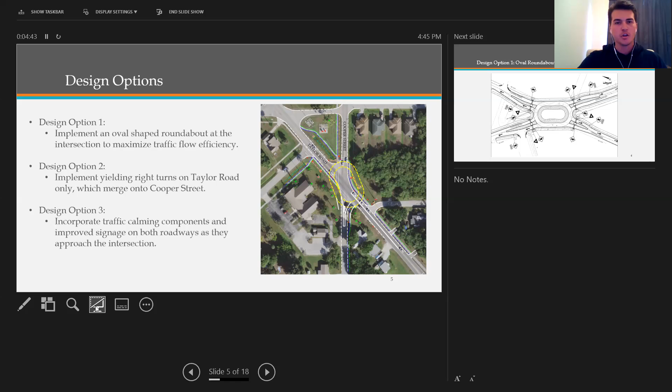Finally, our third design option was to incorporate traffic calming components and improve signage on both roadways as they approach the intersection. These components are designed to keep drivers alert of pedestrians and other vehicles, and can effectively reduce driver conflict as well as improve the walkability of the intersection, which in turn increases pedestrian safety. If I can get the next slide, please.

So this is our updated concept drawing for our oval roundabout design option. It's worth noting that this design avoids requiring any realignment of the existing roads, which can substantially increase the cost as well as alter the traffic patterns that already exist.

The drawing also displays the signage which will be used at the intersection to alert drivers of yielding and pedestrian crossers. However, it's also necessary to acquire right-of-way on the northeastern and northwestern sides of the intersection, as well as to relocate existing utilities.

This design also accounts for changes to the pedestrian pathways in order to maximize pedestrian safety at the intersection, because the existing sidewalks will be impeded by the new roundabout right-of-way that has to be acquired. It's worth noting that this option will significantly reduce the opportunities for traffic collisions to occur at the intersection, which are often referred to as conflict points. Next slide.

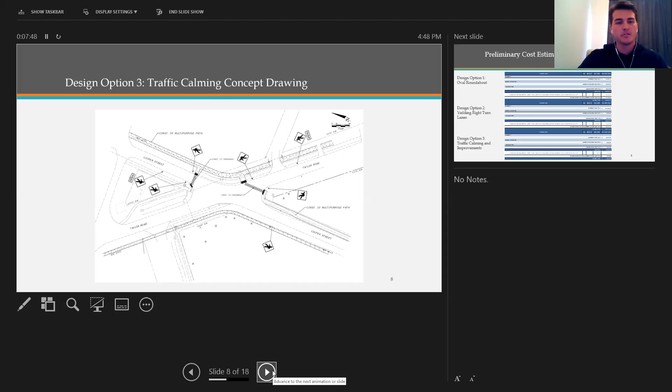Hello, I'm Kurt. For the preliminary cost estimate for the roundabout design, it was calculated that the cost of the roadway would be $745,000. The signing and marking would be $24,000. The cost of landscaping would be $45,000, and the total cost for construction inspection was 12% of the total cost, which was $97,000, bringing the subtotal to $900,000.

For design option 3, which is the traffic calming and improvements, the roadway was estimated to be $43,000. Signing and marking was a subtotal of $7,000, and the landscaping was $9,000.

We decided to do a single lane oval shaped roundabout because it best fits the intersection and it reduces the conflict points from 56 to 16. This would also reduce the severity of collisions as well as traffic congestion and also improve pedestrian safety.

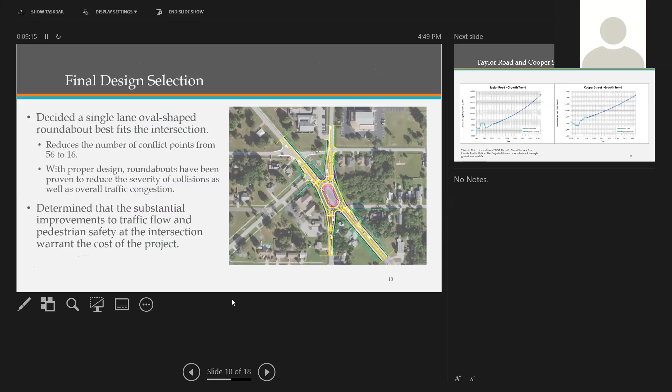Here you can see the Taylor Road and Cooper Street growth trends. They show that the annual average daily traffic for these streets is increasing exponentially as the area gets more populated, and these streets are located next to schools and a church. So these roads are highly congested.

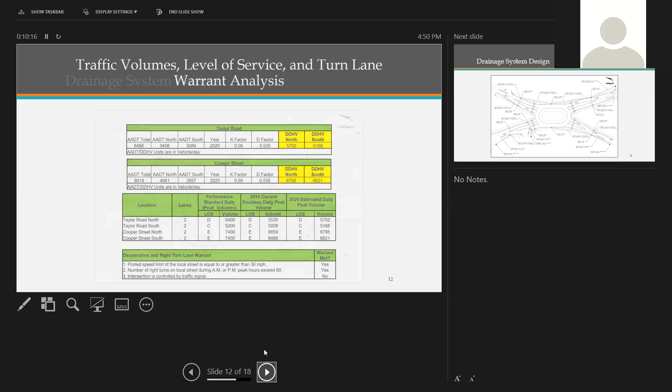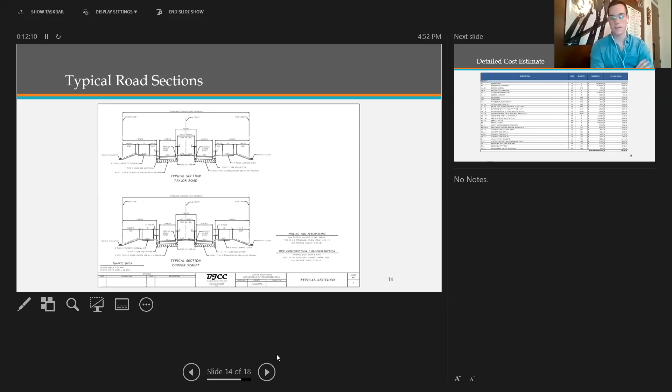Prepare to wrap up. Okay.

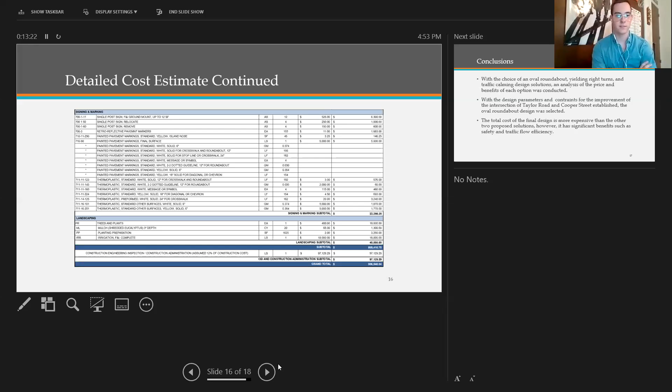Thank you guys, and we're now open to any questions.

Thank you. So if you have any questions for our last team here today? I had a question, Jesse Gill here. What was your design vehicle for the roundabout, and did you run any analysis for that design vehicle?

The design vehicle was the single axle vehicle. The pavement design is based off the truck design, but we weren't required to do a pavement design, so single axle vehicle for a single lane was our design. So the single axle vehicle was the turning vehicle for that job? Thank you.